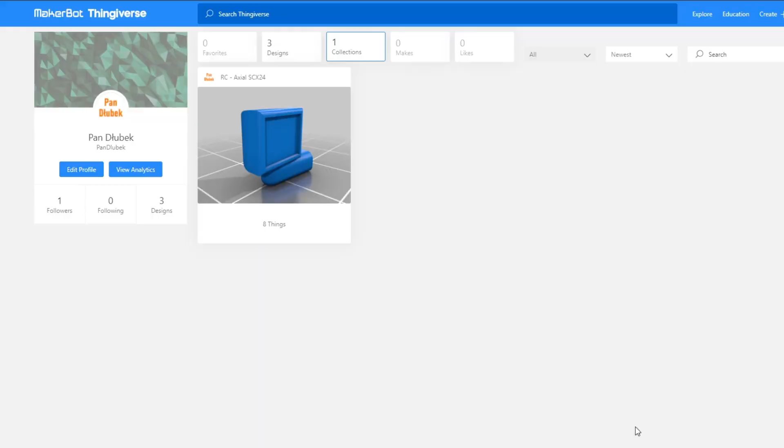Hi! In this video I'm going to present 10 best 3D printed parts and accessories for the Axial SCX24 with the Jeep body. You can find all of them on thingiverse.com, links in the description.

Some of them are my own projects and the rest I just found online. Even though they are designed specifically for the Jeep body, I think many of these projects can be used or easily adapted to other SCX24 models like the C10 or the Deadbolt.

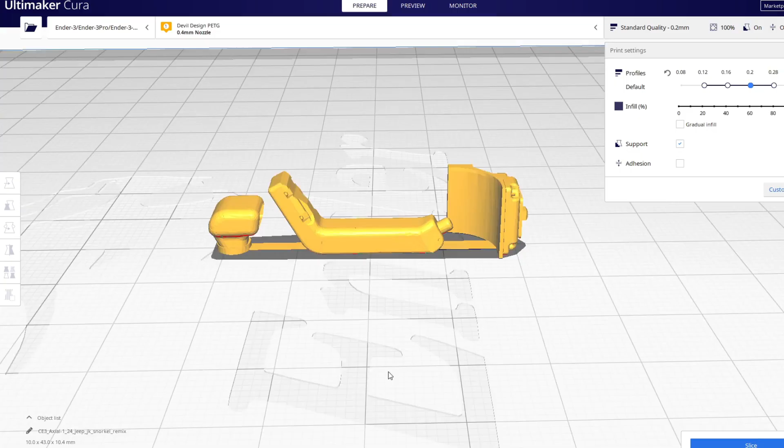So let's start. Number 1, Snorkel. This is my original project. First, I tried to use the scaled-down snorkel from the Axial SCX10, but it was overcomplicated and needed to be glued, which made it too fragile in my opinion. That's why I decided to design my own version of the Jeep snorkel.

The new part has a simplified design and is very easy to print with PLA or PETG filament. To attach the snorkel to the body, you only need to drill one small hole. I use an M1.4 8mm long screw, which is exactly the same as the original SCX24 screws.

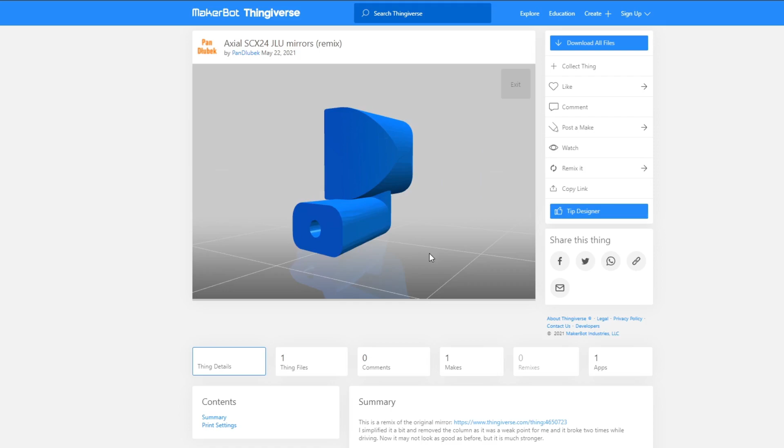Number 2, Mirrors. This is a project by PanDlubek from thingiverse.com. I modified it a bit by removing the column that connected the two pieces of the mirror, as it was a weak point for me. Now it may not look as good as before, but it's much stronger.

The mirror is attached to the body with one 5mm long screw. To imitate the surface of the mirror, I use a silver permanent marker.

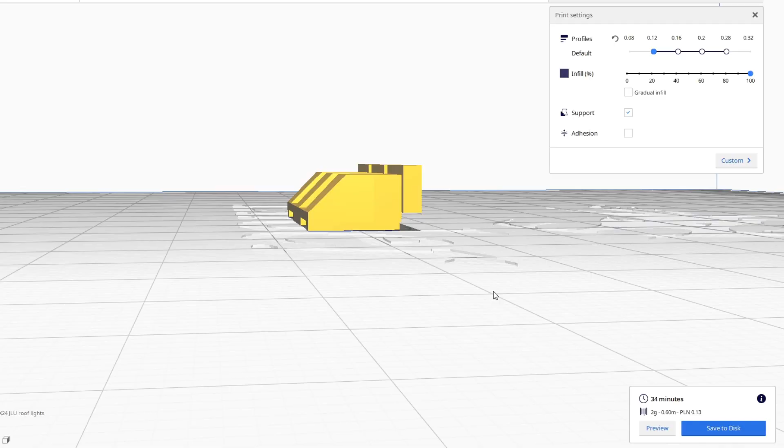Number 3, Roof lights. This is my design, but this time it was inspired by an existing part from a kids' toy. You can find more about it in my previous video about 6 DIY upgrades for the Axial SCX24. It was printed with black filament, so I had to paint the surface to imitate the reflectors. I used the same silver permanent marker as for the mirrors.

Number 4, Roof rack. Because I've already mounted roof lights, I had to fit a smaller rack. Fortunately, I found a great project on thingiverse.com by jshalvorsen. Sorry if I pronounced it wrong.

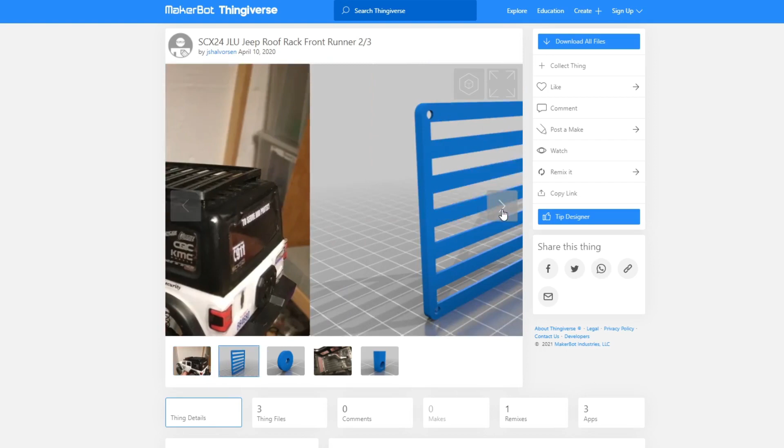His rack takes only 2/3 of the roof. I widened the holes to allow mounting the screws from the top, but this is the only change I made. It looks great, and once you add rubber bands, it allows you to mount additional accessories.

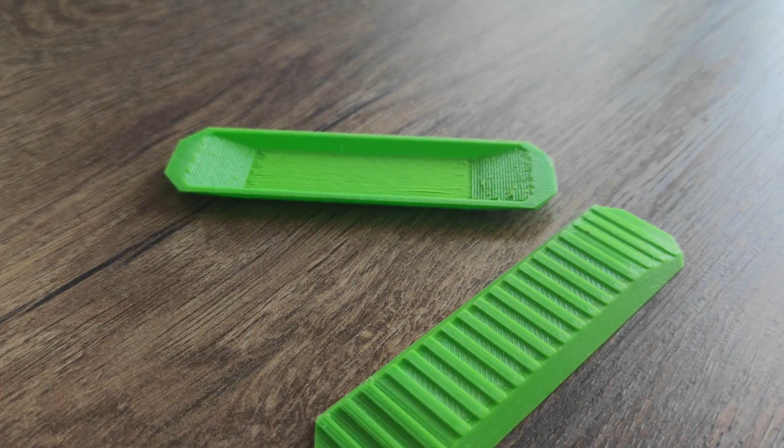Number 5, Scale accessories, like a gas tank, a toolbox, a high lift or a shovel. But my favorite are the anti-skid plates or sand mat plates. I designed them to be a bit longer than the original Maxtrax, but thanks to this change they are not only a decoration, but can be really helpful during the RC driving.

When you no longer need them, they can be easily attached to the roof rack using rubber bands.

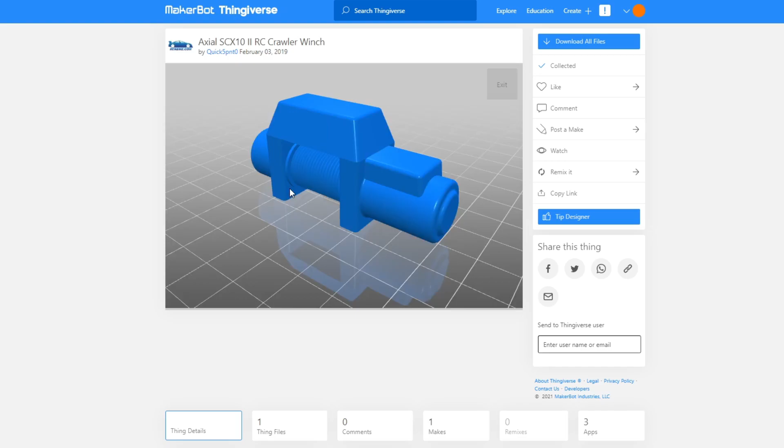Number 6, Winch. This is a scaled-down winch from the Axial SCX10, and unfortunately it's just a decoration, at least for now. I plan to mount a real winch inside the car and pass a small rope through the hole in this small winch to make it look more realistic.

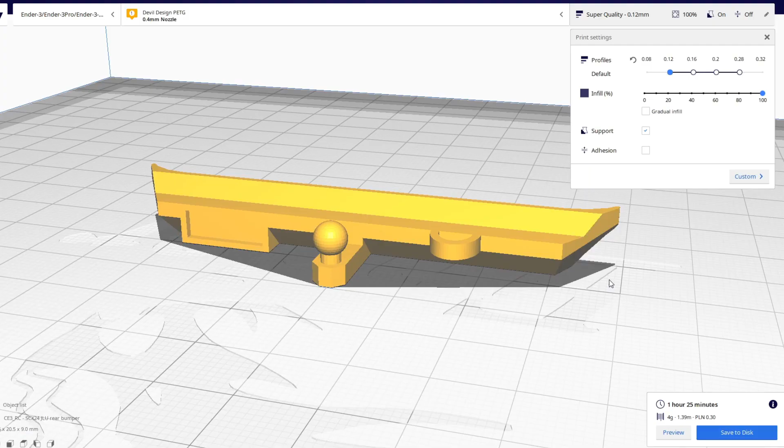Number 7, Rear bumper. The main goal of creating this bumper was to integrate the hook and the handle of the kinetic rope. I have tried to design it as compact as possible to avoid deteriorating the off-road abilities of the car. The hook is strong, so it should handle a small trailer without any problems.

The modified upper section of the bumper allows easier opening of the body with the rear-mounted canister. There is also a place for a license plate.

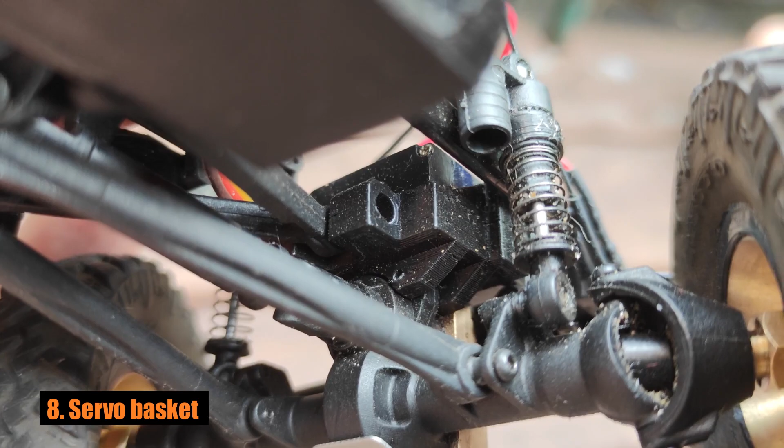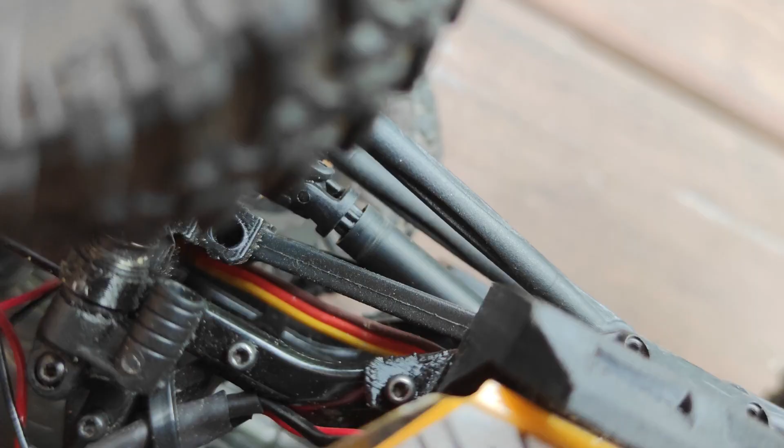Number 8, Servo basket. Some time ago I uploaded a video of replacing the stock servo with the Emax. It is much simpler when using a dedicated servo basket, which not only allows the use of the original short screws, but also solves the problem with the rubbing shaft. This great project has been designed by Leif Nilsson.

Number 9, Shocks preloaders. After all these modifications, the car will increase its weight, making the stock suspension too weak. You can improve it by replacing the stock springs, or just print preloaders from this project. I use 2mm on the back and 3mm on the front.

Number 10, Lower the center of gravity with the new sliders. This is the biggest, coolest and most advanced modification I've ever done to this car. But these are not the ordinary sliders. After adding new accessories to the roof, the center of gravity has risen drastically.

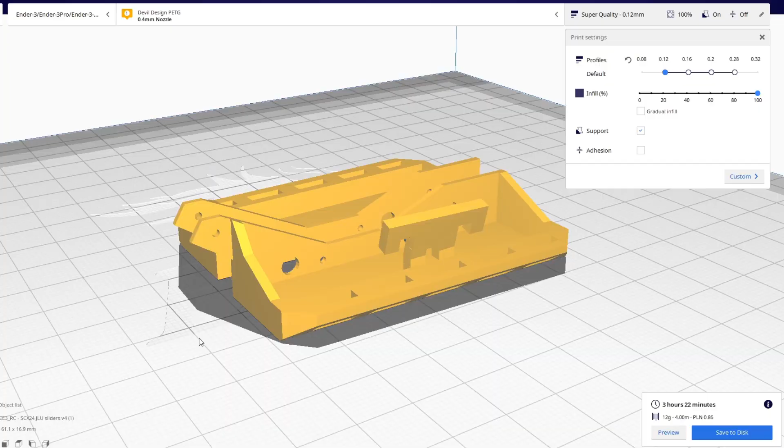To fix this, I decided to print new sliders and move the ESC and the battery there. This design took me a while, but I must admit it works great and it is a real game changer for this car. The off-road capability stays on the same level as before adding all these extra 3D printed parts.

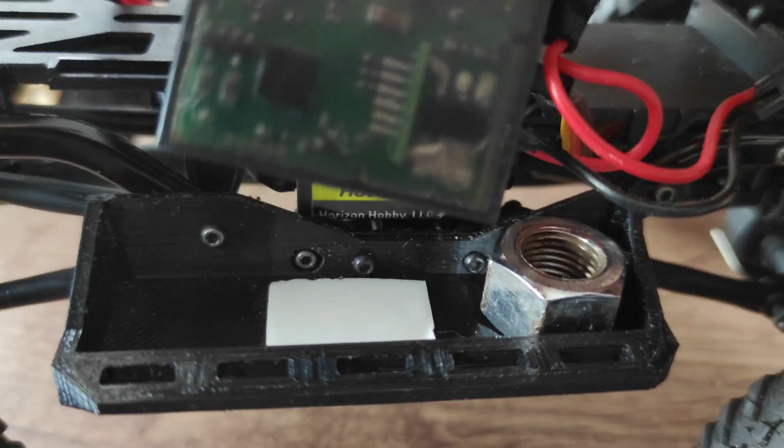However, for this to work properly, you need to weigh the battery and the ESC and try to balance them by adding a load on one side. I used the original ESC and the original battery, so I had to place a 5 gram weight on the ESC side. An ordinary 12mm nut works great.